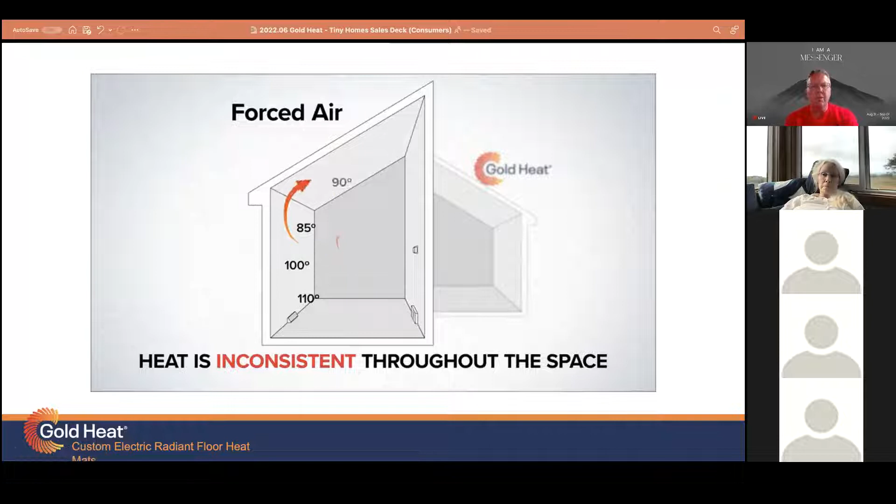Here's how I like to say it, Stephen: keep your body warm from your tiny toes to your nose. This is a good animated picture that shows what we do, which is make electric radiant floor heat.

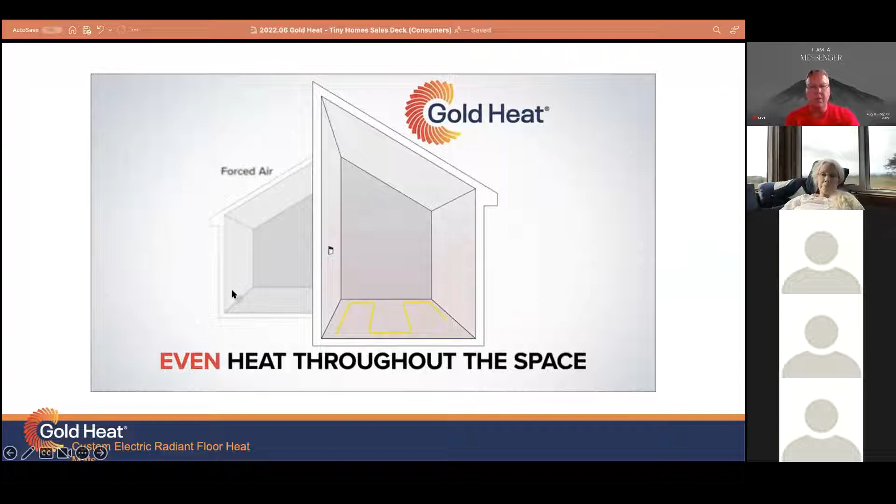So heated floors. On the left is a ducted forced air system or a mini split system where there's a vent and a return. You can see the air travels around, and right above the vent there's a column that gets really hot, but as you get closer to the return, it gets really cold.

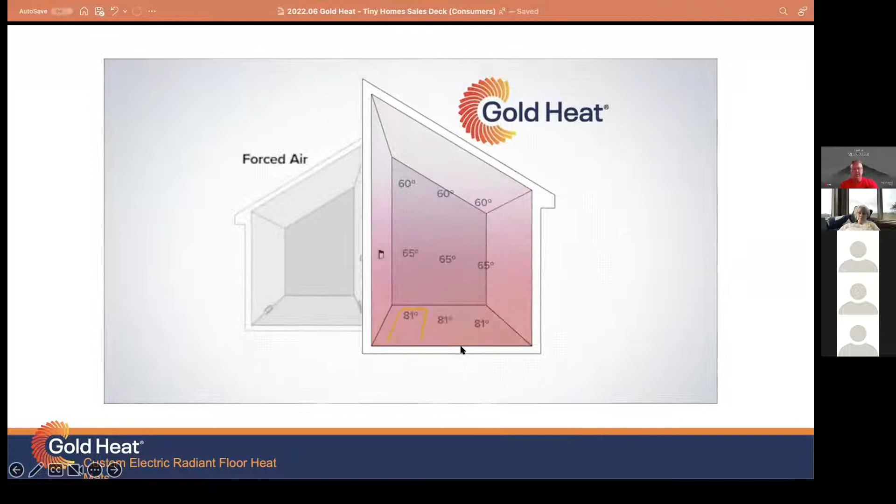With in-floor heating, which is what we provide, here's what our product looks like. It's a really thin film that goes under LVT, LVP, and vinyl style flooring. It heats completely evenly across the floor, routing around your built-in cabinets and furniture, so that everywhere your feet and body can be, it heats an even column going up from there.

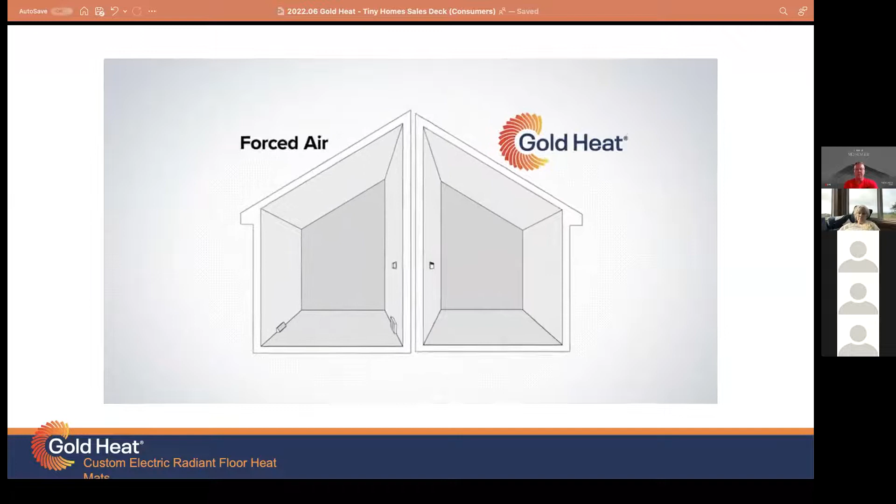And it heats everything that's in its path too, not just the floor. It works on the same premise as rays from the sun. So that feeling you get standing in the sunshine is the exact same science as what radiant heat is doing in your tiny home.

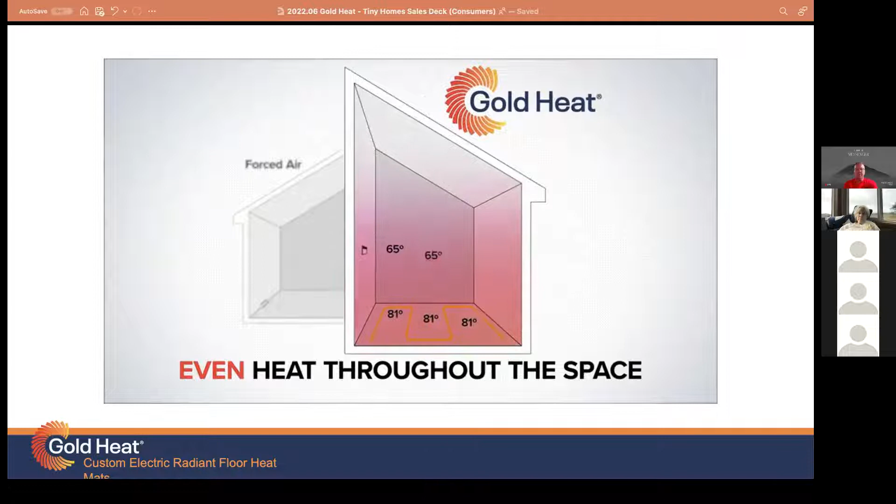Again, with heaters, it leaves some things to be desired. It can add a vent into your wall, some people don't like that, and it makes a lot of noise. With our radiant heat, the whole purpose is so that you don't feel or see any of the material we're installing—you just feel the warmth and heat from our products.

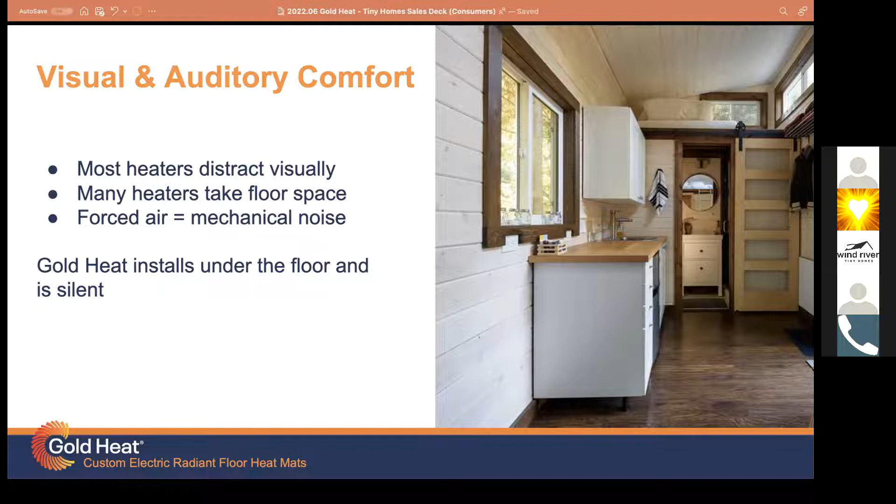Additionally, radiant heated floors reduce allergens because there are no moving parts. It is just heat. There's nothing moving at all.

It's just electricity. A really cool byproduct of installing radiant heat is that it actually helps dry out your floors, and that's something we're very aware of in a tiny home—fighting moisture is up there in the top 5 most important things you're looking to address when designing it.

And in general, because it's strictly electric heating with no moving parts, it's extremely efficient, using easily 15% less energy than a forced air system.

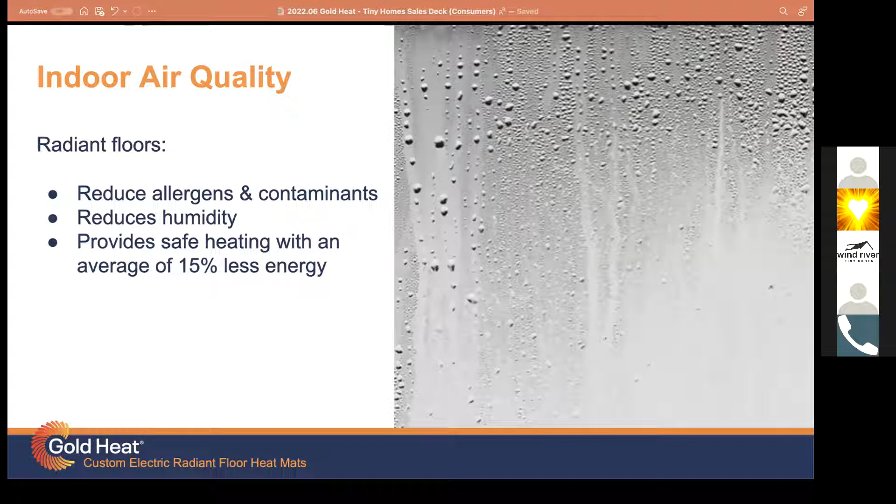So this is what the product is, if you didn't see me holding it up. It's a carbon resistive film on a plastic backer, about a 32nd of an inch thick, and it lays completely flat. You lay it down in strips to cover the entire length of your tiny home, and we can zone it front, back, side, whatever you'd like.

We can most of the time do it on one zone if you just want the floor to be warm. To install it, once you get the box, you take it out, lay it down, dry fit it by laying it out, then mark where the cold leads are—the two black connectors—and the wires themselves.

You'll route a short pocket so you can bring these wires up to your wall. Then, using a spray adhesive and a rubber roller—or even just your hand or something flat—make sure the adhesive sticks. Then you install your floating floor right on top of that. It's really that simple.

We're an American manufacturer based out of Hillsboro, Oregon. All of our products are assembled in Oregon. They're extremely high quality—we have products over 22 years old in the RV business still working today. And because there are no moving parts, there's no maintenance involved, so you can be pretty worry-free about electric radiant floor heating.

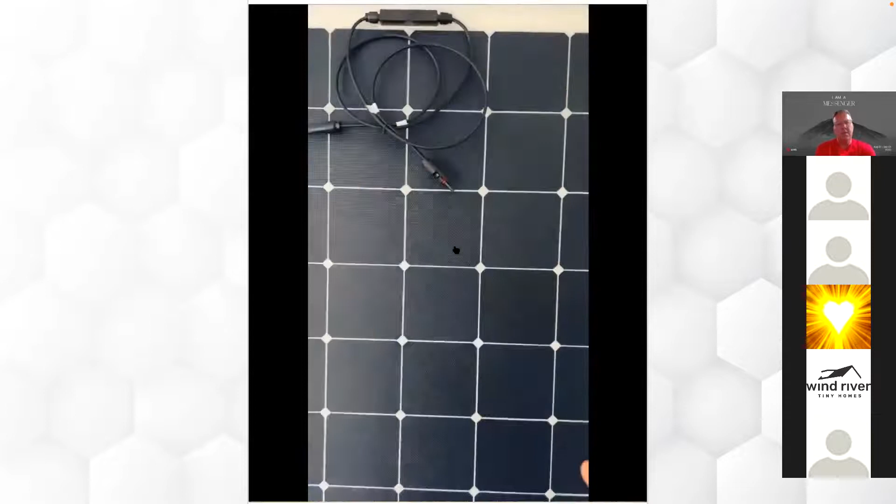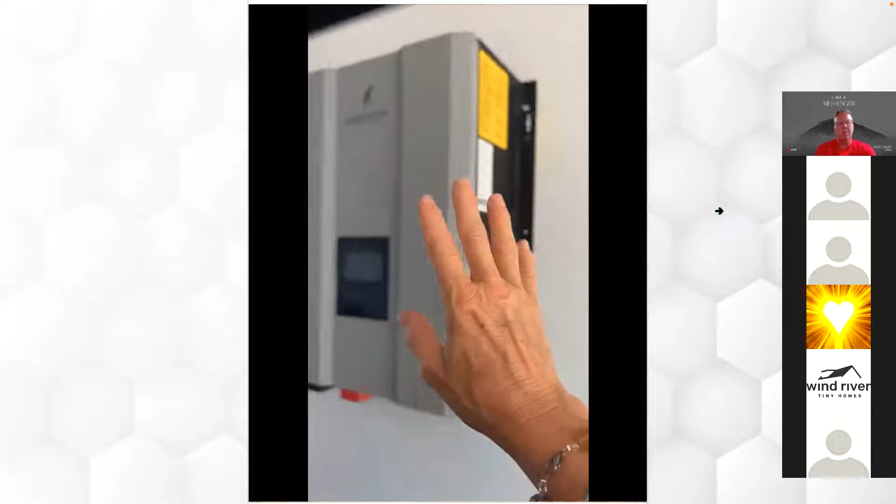Hey everyone, we're here at the People's Tiny House Fest, and the van by Univix is charging all these tiny homes right here. We've got to give you the little inside look: a 200-watt flexible panel—look how thin that is. And then we've got the carbon batteries. A lot of people have heard of lithium, but these last longer and don't deal with so much fluctuation of heat and cool. Inverter, battery, charge controller—I'm Chris Miller with Univix. Visit univix.com and check us out.

All that in under a minute, right? You could tell I was trying to get all the pieces in.

So I just want to hear from those of you here—is anyone interested in using solar in your tiny home, cabin, or home on a foundation? Anyone interested in doing that? There we go—yes, Christina.

Okay cool, so here's the pop quiz: what is the component that makes an off-grid solar system work? Granted, they all need to come together, but what's the number one thing you need to store energy in? The sun? Yeah, for sure, the sun, the solar panel. What's that one? The battery—because the battery is what holds the energy from the day's sun into the night when you're using it to run the lights, TV, computers, all the things.

Okay, so good, I'm glad we got the batteries in there. So these are some of the components that Univix provides, which is so great because inside the inverter is also the solar charger—you usually have to buy all these pieces separately and put them together.

But Univix actually became a company because of a solar design challenge. Chris, the gentleman you saw quickly in the video, had been teaching off-grid solar and green building design for 25 years. They're based out of New Hampshire, super dedicated to easy to install, easy to use, 100% recyclable, and powerful—those are all the things, and oh, one more: affordable.

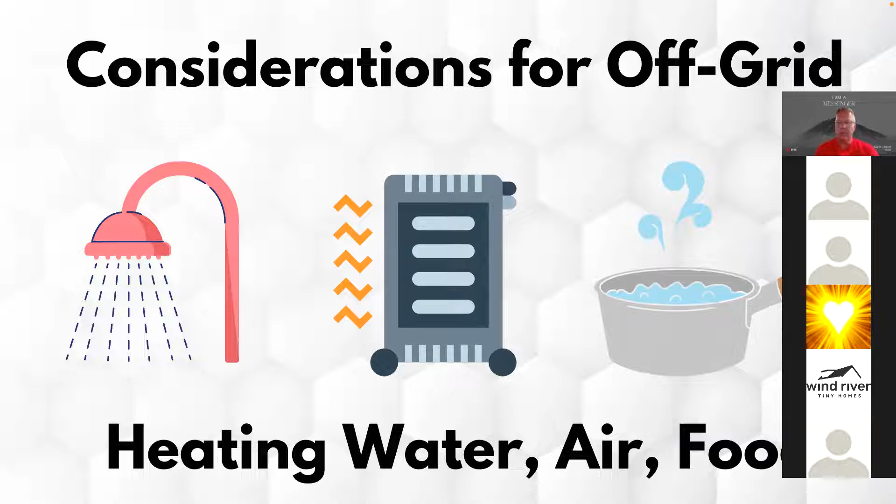And then another huge consideration for off-grid - it's super important. I know a lot of people want to heat everything with electric. However, heating water, heating your space, and heating your food is very energy consumptive. The only difference is with radiant floor heating, you can get more into energy efficiency, heating from the floor up. But it all depends on the sun - what are the hours of day that sun is pumping that energy, and at which time in the day do you need it to be hot or cold?

If you're in Arizona and it's hot during the summer, like the big heat wave coming up now, then your sun is actually out when the heat is the most. Versus a cold day in winter - the sun hasn't risen, it may not rise at all, it's snowing, it's raining, whatever, and now you want to heat your space. Most likely you're going to want to do that with some type of propane, natural gas, or wood when it comes to heating, especially if you're fully off-grid.

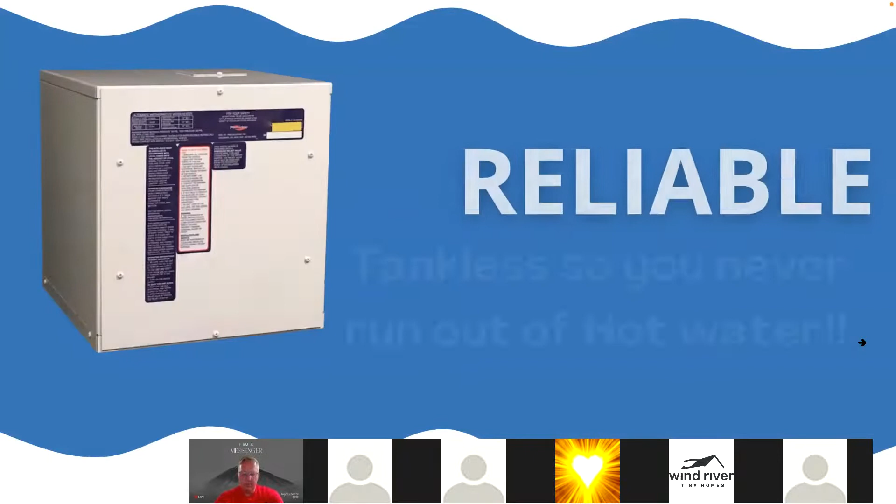The super important thing to note is what you really want in your on-demand hot water tank is reliability - tankless so that you never run out of hot water. That's the beauty of what these on-demand systems provide. And what's so great about the RV 550, one of the products that's really been hot in the market, is providing that tankless water heat to an industry that is on the move.

5 days a week, we have a human on the phone. Basic questions can be gotten, both sales questions and features, and our manuals are online, and the warranty online. By the way, it's 2 years parts and labor.

You can go to precisiontemp.com and click the proper links for the product you want to look at, and it'll give you comparisons, installation instructions. When people buy directly from us, the manual will come in the box, but if you want to get a head start, go online, read the manual - it's very straightforward, simple installation, but read the manual. If you have any questions, call us. I can't emphasize enough calling us for questions, whether they're installation questions, feature questions, or service questions.

Another important feature is that with no pilot light, you get up to 35% more efficiency. This is featuring the Twin Temp 2, a bigger system, also a tankless water heater plus hydronic heat, so it can provide more of that general space heat.

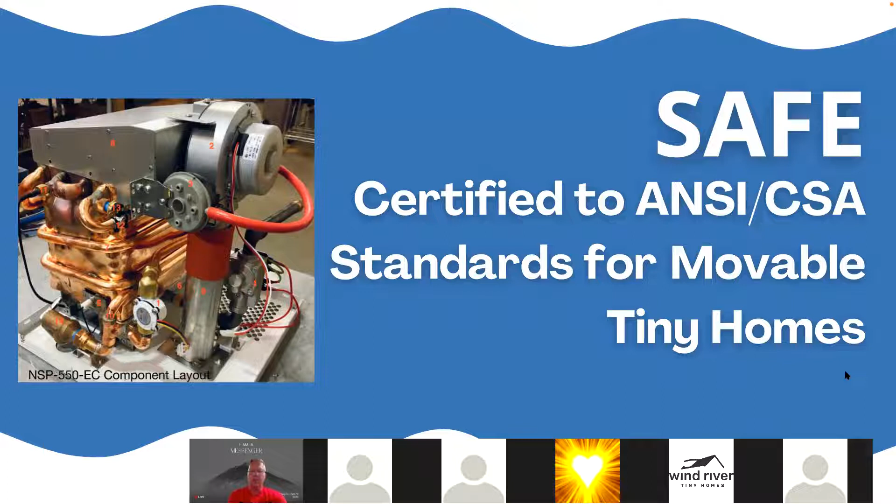What's great about Precision Temp is they are focused and dedicated to making sure safety is at the top of the list. So I use this last because I have my own little story of our on-demand hot water tank. When our builder said goodbye, we had to put in our own. As DIYers, we didn't know that you needed to have a certified for mobility unit, right? When these things shake, rattle, and roll going down the road, little parts could end up breaking. So what they do is put these under a vibration test, and once everything is still working, that becomes certified to meet ANSI and CSA standards, that's Canadian, for movable tiny homes.

So super important. Everyone needs to know, if you're working with builders they pretty much know this, but it's always great to check. Especially if you're working with new builders, tell them to call Precision Temp, because they're tried and true in the industry. A lot of builders use them, and they want to use the right kind of product, because the last thing they want is someone to call and complain. That's very much what happened to us when we bought a product off Amazon. We didn't know it was really for a permanent home that didn't move. I've seen one other builder use that same exact on-demand hot water system, and told them right away. Fortunately, he had just installed it, never turned it on. I said, if you take everything apart, put it back in the box and send it back, you can probably at least get your money back, maybe with a restocking fee. I've told a number of people that thought they could order anything just like a regular home would need. But a movable tiny home, even if you're getting it in a factory and it rolls on the road a few miles, it needs to be built and designed for movability.